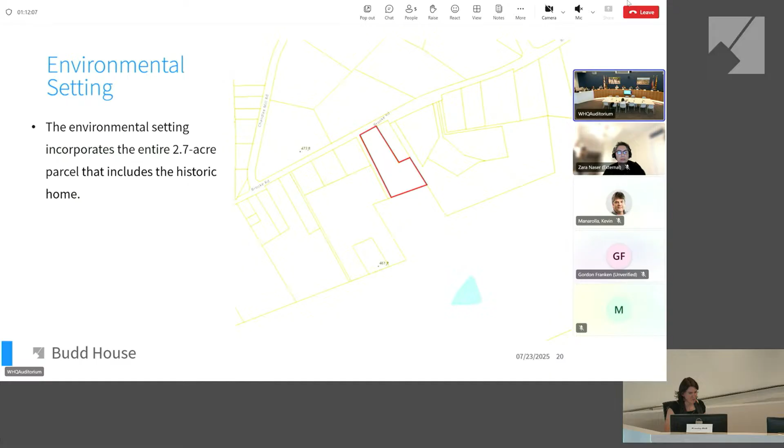Again, overall, staff found that the property meets the designation criteria and requests that the HPC takes the following actions: one, finds that the house meets the designation criteria; two, recommends that the planning board lists the property to the locational atlas; and three, recommends that the county council list the property in the master plan for historic preservation.

And this is our tentative timeline. We're hoping to go to the planning board in the fall and then on to the county council. And our last slide. Any questions?

Thank you. And we will now ask the property owner to speak, if you would. Good evening. Not just yet.

My name is Romaine Marie Rose, and I am the great-granddaughter of Richard Perry Budd and Amanda Armstead.

These are wonderful portraits that even as an infant coming into the living room, in the corner of the room, these were displayed. I will be 72 years old in 6 months. And it's been absolutely incredible that when I glance over and am able to see these photos, these portraits.

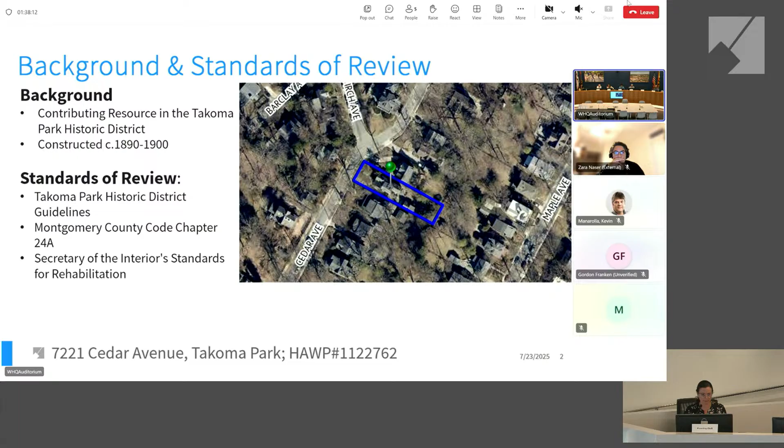Subject property includes a historic main block constructed in the 1890s with modifications made to the rear L, presumably around the 1930s prior to designation, and post-designation in 1994, 1999, and 2005. On the left is the Sanborn map from 1927 showing the historic main block and rear L with an open rear porch. On the right is an undated photograph from our files, which likely dates to the 1980s or early 1990s, since the district was designated in 1992.

Here are some photos of the property from HAWP applications in 1994 and 1999, showing the formerly open porch seen in the 1920s Sanborn was later expanded and enclosed into a shed-roofed addition with 2 windows on the south elevation prior to designation.

The property then received several modifications to the rear, including some minor fenestration alterations in 1994, construction of a 2-story rear addition that modified the original rear L and infilled the space over the earlier 1-story shed-roofed addition in 1999, and construction of a 2-story rear addition in 2005.

Here are a few existing conditions photographs showing the property. Some views towards the north elevation, location of the proposed skylight in 2019 before construction of an addition next door, and in December 2024 after that addition and without foliage on the trees.

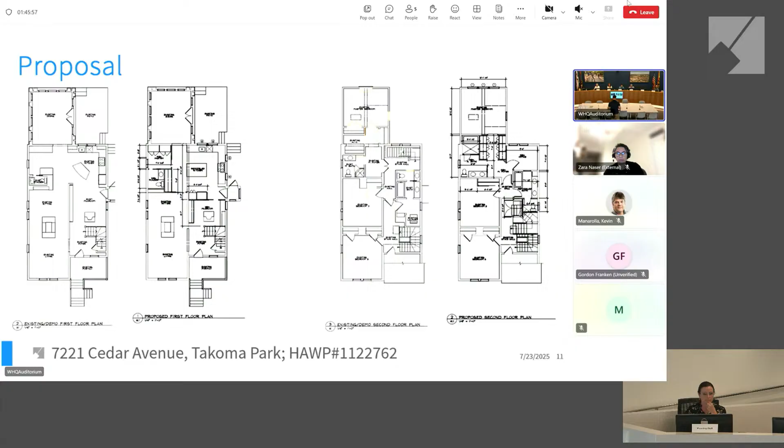Hi, Eric Saul. I'm the architect for the client, or the homeowner.

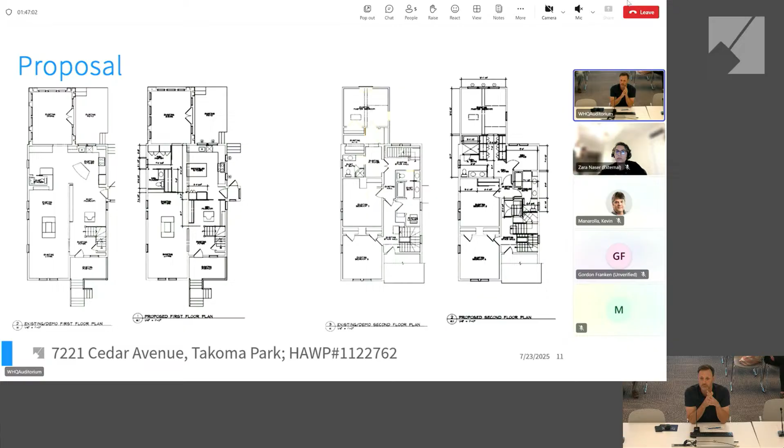Thank you. You don't often see windows buried in the framing of the house and just left, but are there any other questions for the applicant?

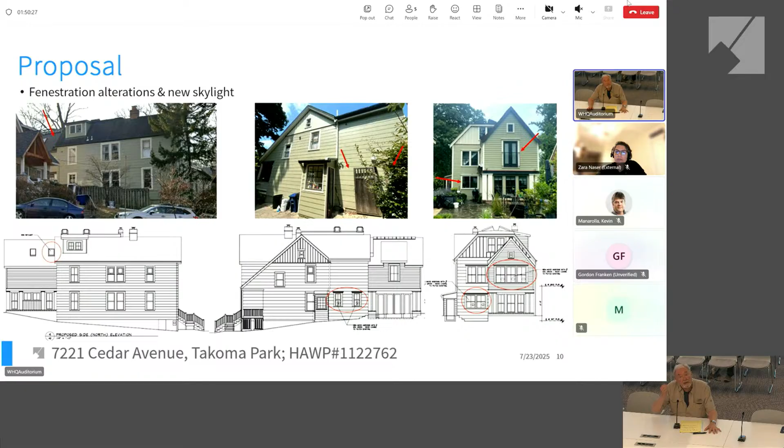Turning to the other point the staff mentions, that this is not truly visible. I think that relies on the fact that it would be directly visible but for shrubbery and vegetation, and I think the requirement is that we not consider shrubbery and vegetation as a legal basis for saying something's not visible. If this side of the house were deemed not sufficiently visible, we would be down to just concluding that the only visible part was the front of the house.

This is as visible as anything on the side, and both sides are visible from the street. So I'm concerned about those two windows specifically, and I want to emphasize that under Rehabilitation Standard 2 of the Department of the Interior, alteration of features, spaces, or spatial relationships that characterize a property will be avoided, and that's what the introduction of these two windows will do - alter those spatial relationships - and they are not dictated by the rehabilitation requirement that requires a new use before adding new windows to rear or other secondary, less visible elevations.

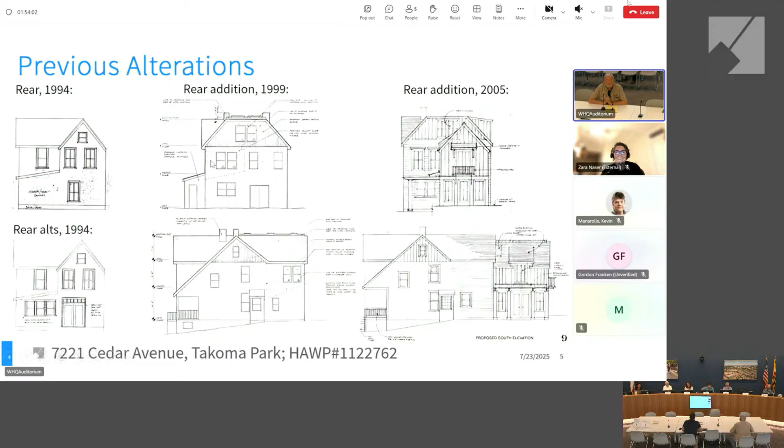And those two - I'm just trying to get my head around the construction of this area, of the portion of the house. There was a shed portion before the second floor was added. So historically, that shed portion was out there after 1927, but, looking at the picture right now on the screen, when was that added to the house?

This is Laura with the staff. My best estimation is, again, just post-1927. Unfortunately, the Sanborn maps for this area, I was only able to find the 1927 one. The following Klinge atlases, the first one is in 1931. It shows a rectangle with a front porch, but those atlases are slightly less detailed than the Sanborns were.

But here, the dashed line indicates an open porch, one story. It shows that it's set in from the side elevation. So my best estimation is between the 30s and 50s for the extension of that shed out to that line, and the enclosure. So the '94 addition just added a second floor to that? In '99, they added the second floor.

If you could go back to that previous photograph. So that photograph is 1999 - this one. That one is - okay, so the second floor hasn't been added. Correct. And this is from that application for that addition. And there are clearly two windows there, and you can see the sills - they're in shadow, but you can see two sills in shadow here also. Okay.

And thank you for coming forward. We always welcome all comments in this meeting, and we appreciate that you've come tonight. Moving forward, item 2F at 10012 Menlo Avenue, Silver Spring. Is there a staff report?

Good evening, Madam Chair. Dan Bruechert for the record. This is a retroactive HAWP at 10012 Menlo Avenue in Silver Spring. This is a nominal resource, which for the district is post-1935 within the Capitol View Park Historic District. The house itself was constructed circa 1946, and this is to be reviewed under Chapter 24A, the adopted Capitol View Park Master Plan Amendment and the Secretary of the Interior Standards for rehabilitation.

Just to familiarize yourself with the block that it's on, it's surrounded by largely non-contributing resources. As you get to the north, we do have a 1923, a 1906, and an 1890 house, but none of those are in the direct view shed.

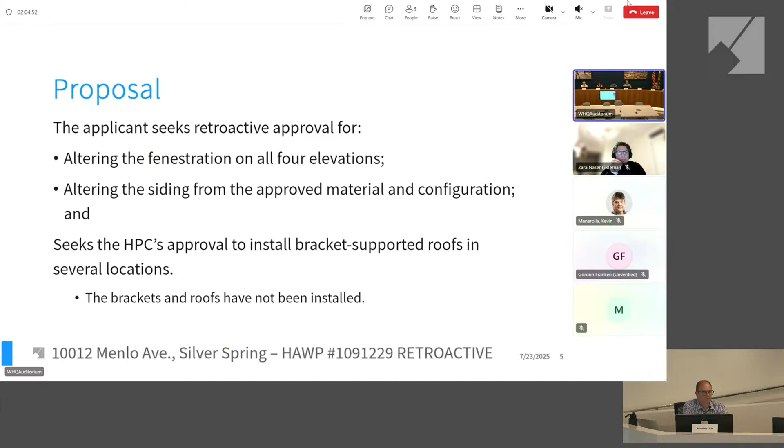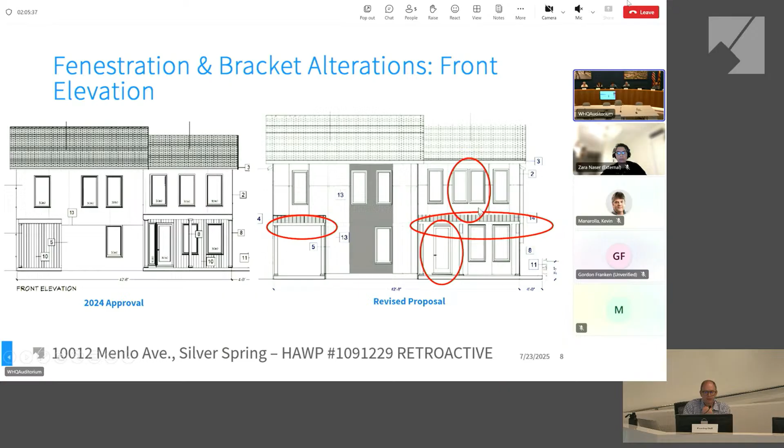So we're going to work through fenestration and bracket alterations first. This is the front elevation. You see proposed bracket-supported roofs on the left and the right. Instead of the approved 3 windows, 4 were installed on the second floor. The approved door had a sidelight that was removed.

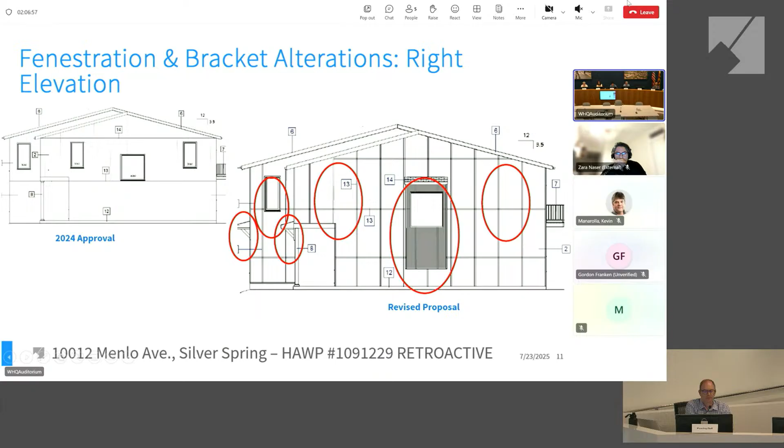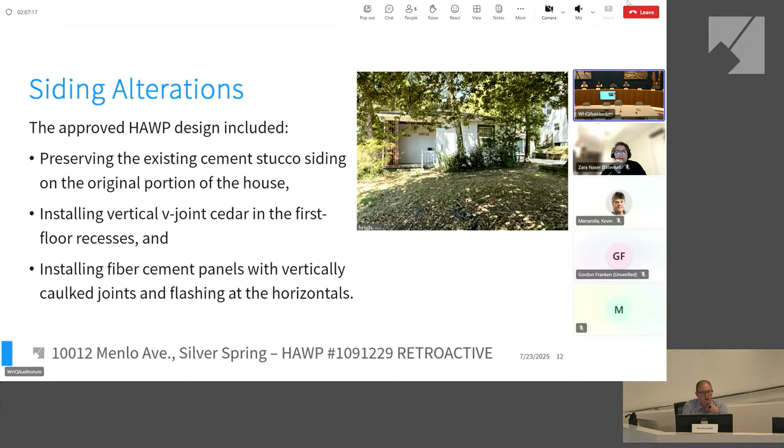The approved design also included preserving the existing cement stucco siding on the original portion of the house, installing vertical V-joint cedar in the first floor recesses on both the left and right, and installing fiber cement panels with vertically caulked joints and flashing at the horizontals. These are the approved siding materials - you see examples of the caulked joints with flashing at the horizontals, and the cedar was to be installed vertically rather than horizontally.

During construction, the applicant installed a rain screen, which altered the overhang and the ability to install or express the stucco as originally proposed. This is the result - we get sort of Hardie trim pieces, a 1x3. If this were all vertical, it would be board and batten, but it may just be considered battens.

At the front, the commissioners pointed out that the central form aligns with the top of the window, but it doesn't align with the rest of the siding on the first floor.

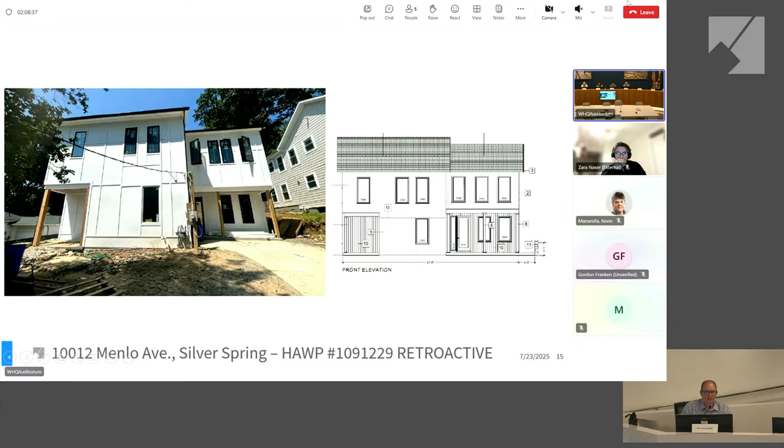Going back again, this space was supposed to be expressed cement stucco siding. We're supposed to have vertical cedar planks installed here and here. On the left side, we have a different expressed first floor, except the treatment was applied throughout the entirety of the left elevation.

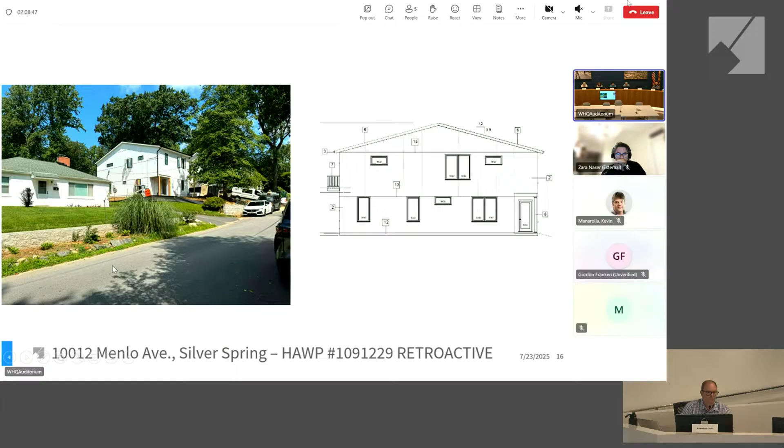And then on the less visible sides, again, we have a different treatment on the first floor than the second.

Staff's findings as it relates to the fenestration alterations: we find that they don't have a substantial impact on the overall character or compatibility of the building. The original approved window placement lacked a formal arrangement and was going for a sort of contemporary design using many of the openings on the existing first floor. Staff finds that the projecting bay and small shed roof on the right elevation do not disrupt the overall massing of the approved design and are on an elevation that has limited visibility due to the setback of the neighboring house. However, staff does not find that the proposed shed roofs over the 2 paired windows on the left elevation are a compatible feature.

Staff does not find that the proposed siding treatment is typical of a historic district and finds the treatment more consistent with commercial or apartment buildings, and finds that the applied grids disrupt the flatness of the approved design. Staff finds that the removal of the vertical siding on the 2 front recesses eliminates additional material variety, resulting in a monolithic uniform appearance, and staff finds that the misaligned trim at the front of the house draws additional visual attention to the siding treatment.

Staff finds that eliminating the cement stucco siding eliminated a strong horizontal element that helped break up the highly visible elevation's massing, and notes that traditional architecture would often apply a bandboard to break up a single plane, just to make the massing appear a little less massive.

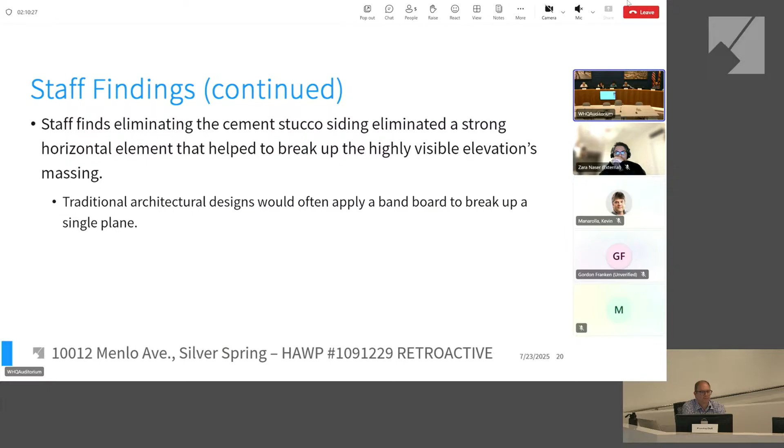So staff actually has two recommendations: approval in part and denial in part. Staff recommends the HPC approve the HAWP for the fenestration alterations under 24A8, B2, and D, standards 2, 9, and 10, with the added condition that detailed specification sheets with dimensions must be submitted for the new windows, and dimensions and specifications for the proposed roof brackets must be keyed on revised elevation drawings. The rendered bay window projection must be removed from the right elevation and is not approved.

With final authority to verify these details have been satisfied delegated to staff, and additionally, staff includes as part of that condition that no final inspections of the property will be approved until this condition is satisfied and the HAWP document issued. And that the HPC deny the siding revision HAWP under 24A8, in violation of 24A8B2 and D.

Alternatively, and this was laid out in the staff report, if the HPC determines that the revised siding is acceptable, as it does not alter the size, scale, and massing of the proposal, staff recommends the HPC add two conditions: one, requiring the application of a traditional stucco finish to the entirety of the first floor, and two, that the central panels be removed and reconstructed to align with the front elevation on both the first and second floors. And with that, I will answer any questions you have.

Are there any questions for staff? This is Chair Burdett.

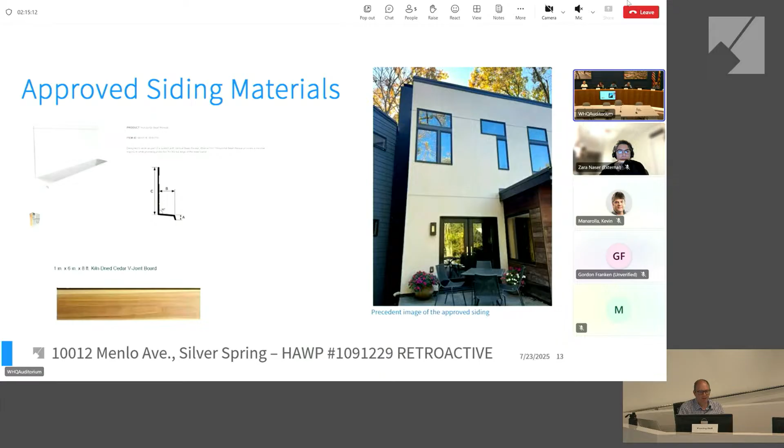Okay, so I think it's more about adding to the streetscape and just the overall construction of the district. But as staff noted in the initial slide, this whole area of the district was constructed sort of post-World War II. So none of these resources, aside from the three at the north end of the block, are identified as one of the two contributing periods of construction within the district. Okay, okay, thanks.

Are there any other questions for staff? If not, I will ask the applicant to come forward. Mr. Salim Badawi?

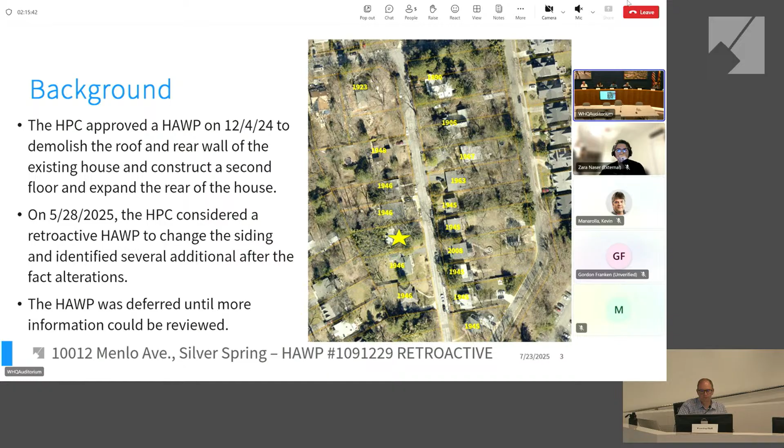And if you'll turn on the mic and identify yourself and your relationship to this project for the record, please.

Thank you. My name is Salim Badawi. I'm the owner of the house on 10012 Menlo Avenue. You can make whatever presentation or explanation that you'd like to make about the situation now.

Okay, so as discussed last time, the plan was to install fiber cement Hardie panels with caulking in between the joints between the panels. And as mentioned before, when I spoke to contractors, none of them seemed aware of that product, the Stucco Hardie panels, and I couldn't even find them. You can do your research on Home Depot, Lowe's, ABC Supply - none was carrying them.

The other main concern was what the contractor said - that if you caulk between the panels, and this is a new house, we're doing an addition but it's almost a new house, the house is going to settle, and all the caulking is going to crack, and you will have to reapply the caulking again. That for me was the biggest issue, because I don't want to leave the new homeowner with something like that.

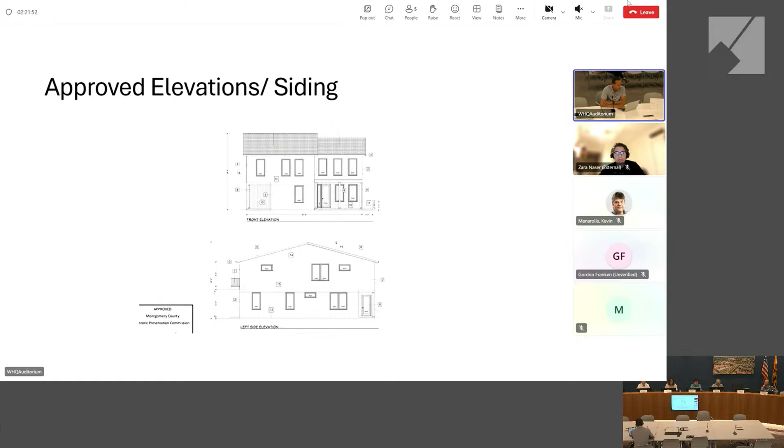So if we go to the third slide with the front elevation - here we go, front elevation. The proposal is to add two roofs and brackets over the two porches and apply a different paint color. Understand that paint color is not restricted or doesn't need to be addressed by the HPC, but I'm trying to show it with the plan on the front elevation.

For the rear elevation and the side, you can see that we added a bay window. There was a window, but there wasn't a bay structure. This was completely unplanned. What happened is that because we have a 10-foot ceiling on the main floor, we had an issue with the staircase. Because of the height, to get the right slope by code and the right height for the risers and the depth of the treads, we would have gone into the hallway by about 1 foot. So after a lot of deliberation with the contractor, it seemed like the most plausible option would be to push that wall - behind this wall is the landing of the staircase.

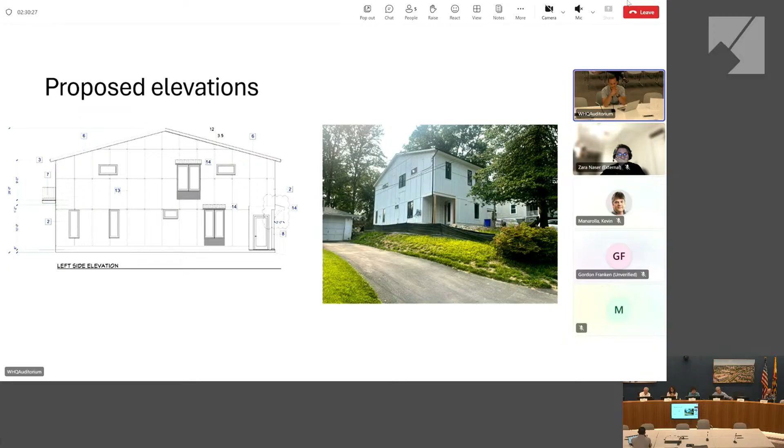Are you going to widen that horizontal band separating the second floor from the first floor? Yes, we're going to install a band, like a 1x8, that goes straight across.

It looks awkward now, and that wasn't the plan. So what we're going to install is what you see on the elevation now.

So on the two upper windows, are you going to get rid of that cross piece, and bring the battens down to the fatter horizontal? The two other windows on the second floor, with the little panels below, we're going to remove them.

So what will it end up being? Will it be like four battens across there, going all the way down to your horizontal? Because you've got to have some seams in there, and all your other seams are battens. I'm just curious about the pattern when you're done, once you take off that out-of-place horizontal piece, if those verticals are just going to come straight down to the band below.

I'm thrilled that you're putting in the band, by the way, because it's driving me crazy that those things don't line up. So I'm encouraging of that.

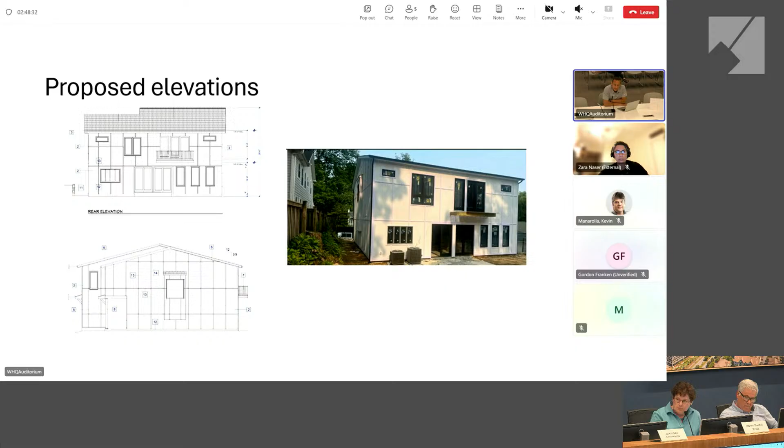I'm not going to go into all the things I think are wrong with this, because there is so much. I was going to tell you you should look at another system if you can't get hold of the one you wanted to use. There are other manufacturers out there you can use, but obviously you've thrown out that idea because you say it's not available, even though I'm not sure you've done your research. So I'm going to ask staff to please explain in detail your recommendations from your report on what we approve and what we don't approve.

Now I have to respond to what you mentioned, that I kept going after April. Can you show me where I kept going after April? Well, the rain screen for one. What is rain screen? I came here after I completed the siding, after I installed all the Hardie panels. That rain screen was completed before I came here in April. So I'm sorry, what you said, that I kept going after April, that is entirely incorrect.

Entirely incorrect. And if I go back to what you mentioned, that I had to keep the stucco, no, I didn't have to keep the stucco, and I wasn't told to keep the stucco. It was my proposal to keep the stucco. I was never told that I had to keep the stucco. Okay? Let's talk about keeping the stucco.

It bypassed us, or we overlooked the fact that it would have looked awkward that we keep the front and the part of the left side. It bypassed us, or we overlooked that, and it wasn't caught by the staff as well. Then if you go back, can you show us the picture with the stucco and the rain screen? Yes. So there are some parts that you couldn't foresee, okay? And this would have been looking very awkward if it was kept like that. That's when you come back and let us know.

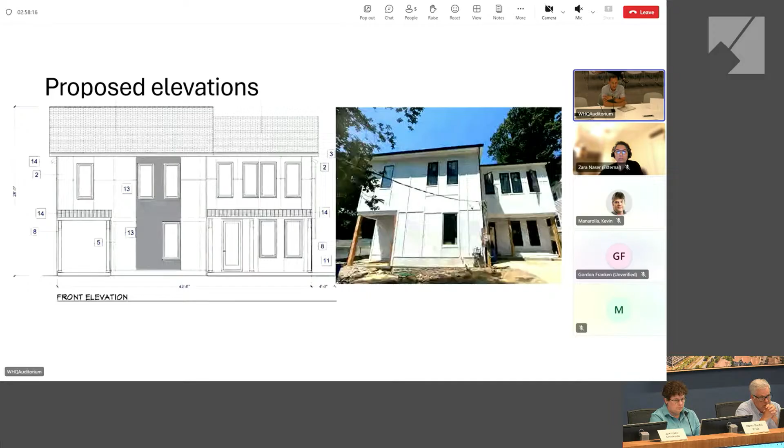If you go to my presentation, the last slide. This house is on Nebraska Avenue Northwest, so that's a historic district. You can see that on the second floor they have the same siding treatment, 1x3 trim work around the windows. On the first floor they have brick, with a bonding beam in between, which I think successfully breaks up the front elevation. It's a very similar structure to mine.

Do you notice that the batten locations are more balanced than what you have? Correct, yes. And that comes from placing the panels, having forethought about how the panels get placed on the elevation, and not just slapped up? Correct, yeah, I admit that.

Dan, can you bring up your recommendations? Okay.

Staff is recommending that we approve in part the fenestration alterations, with the condition that detailed specification sheets with dimensions must be submitted for the new windows, and dimensions and specifications for the proposed roof and brackets must be keyed on revised elevation drawings. The rendered bay window projections must be removed from the left elevation and are not approved. Final approval authority to verify these details have been satisfied is delegated to staff.

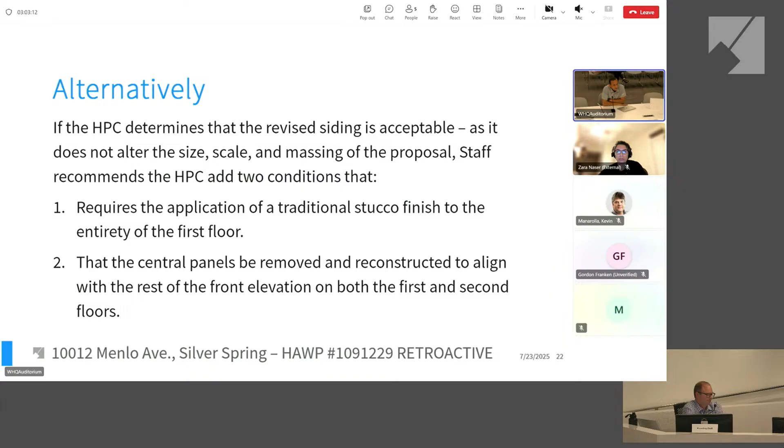And you can do a traditional stucco finish on a rain screen with the appropriate backup. Commissioner Doman is right there, so there's your answer. I guess mine was given the inflection of a question, but I know perfectly well it's a doable thing.

All right, would the commissioners care to deliberate? Commissioner Doman.

The house that our applicant showed on Nebraska Avenue, is that actually in a historic district? Yeah, it is. Okay, but it's not in Montgomery County, it's in DC. No, yeah, DC. And as you have testified, it is very similar to what we are suggesting, if the HPC approves.

Yeah, I mean, it is in a historic district, and they have a similar treatment. I was lucky, I'm glad that I found this picture of the house. I stopped the car and took a picture of the house.

So they have similar siding treatment on the second floor, and at the first floor they have brick. So if we do stucco, I think the stucco can be applied on the Hardie cement panels. I believe we can do that. Yeah, that was my question.

I think the way it's leading is that the recommendation, the alternative recommendation, is to make the first floor stucco. And you are fairly certain that can be done? We have cement panels, I'm sure we can apply stucco on top of it.

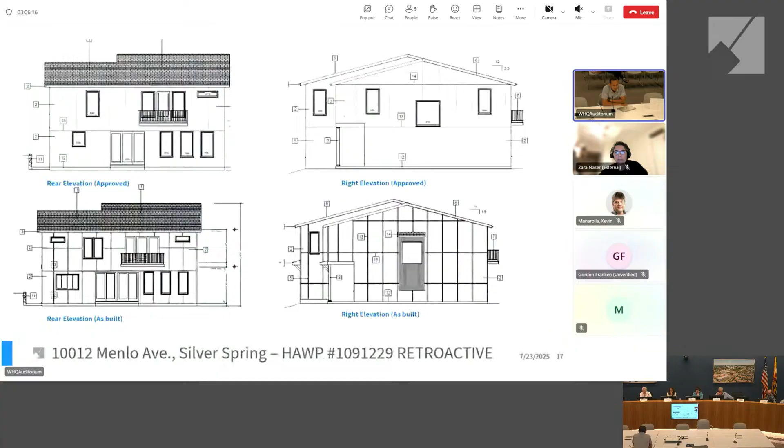So proposed on the left elevation, bringing it back here, the applicant proposes to install two very small roof overhangs, sort of almost as a window hood above these two paired casement windows. Staff finds that those are an incongruent form and aren't balanced and compatible with the design, and are recommending that they not be installed. They haven't been installed to date. We're recommending we're okay with the right bay because of its limited visibility, particularly as it relates to the house next door, but we're recommending that the approval not extend to these features.

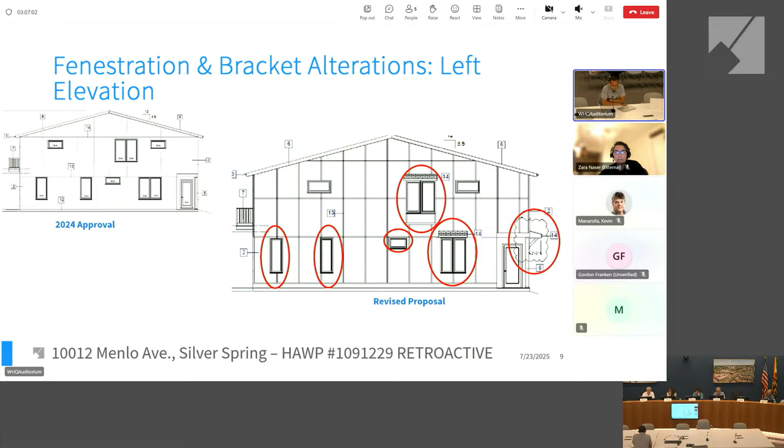And I understand. Okay, so for the applicant, if I deviate and ask a question, this doesn't pose a problem for you, does it, to remove those little sheds? No, I'm volunteering, they're not even installed. I understand, I'm volunteering to do that, and I was going to incur more cost to address that large wall. I don't have to do it. If you guys don't want to approve it, okay. Alright, that's all. Thanks.

Commissioner Pelletier? Oh, my mic's been on this whole time.

I do not like those little projections over the bays because they don't look modern. You're doing a really modern house here, and those are kind of like farmhouse sort of awning things that I don't think it needs. I would recommend not doing those. I don't have a problem with the bay where the stair is because you can hardly see it. But I would approve this in its current condition.

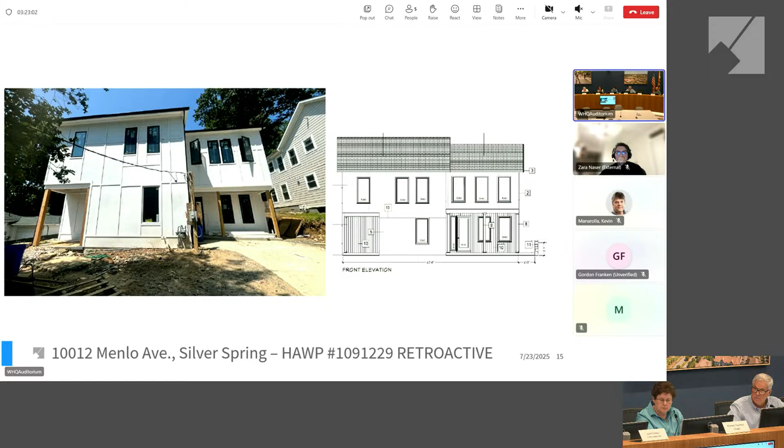Is staff okay with that? Staff understand that? Yes, Madam Chair. Does the motion also delegate final approval authority to staff, or do the commissioners want this submitted as a revised HAWP? I think we delegate to staff, please. Second with the stated details, this is Commissioner Pelletier.

All in favor, say aye. Aye. Aye. Chair abstains, this motion passes. I'm sorry, did we get a vote from Commissioner Naser? Yes, I said aye. Okay, thank you. So 5 ayes, 1 abstention. This HAWP passes. All right, thank you.

Thank you, commissioners. It was a painful process, unintentionally, I promise, and hopefully I wouldn't come before the commission again. But thank you so much. I appreciate everything you're doing. Thank you.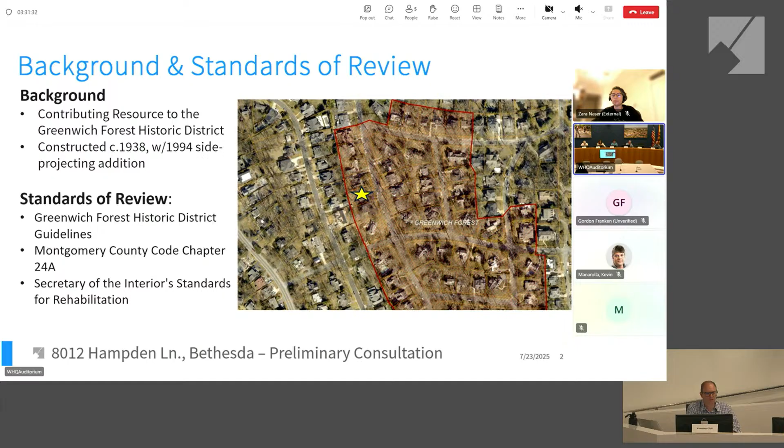So the applicant proposes to remove the existing slate roof and install a new architectural shingle roof. This is a detail of the building you see, sort of modeled with a slate roof with greens and reds. The report indicated that there were over 500 slates that were damaged or cracked, and that at a certain point the roof reaches a tipping point where it needs to be replaced rather than repaired. I'll note that there are 2 sections of 3-tab asphalt shingle on the rear of the 1994 addition, and then a 1-story shed roof addition of unknown date that also has 3-tab asphalt shingles, although the original side porch still has slate on it.

So the reason we're here is guideline D7 is either internally inconsistent or just a little convoluted. I've broken this up into a number of bullet points. Guideline D7 in the design guidelines, regarding building materials, says replacement of roof, siding, and trim with original materials is strongly recommended and is considered maintenance that will not require an application for a work permit.

That's in-kind replacement, which is acceptable in every historic property. It says the use of non-original like materials, such as architectural asphalt shingles, requires a work permit to ensure that they match the scale, texture, and detail of the original materials and are consistent with the overall design of the existing house. For example, homeowners wishing to replace slate or tile roofs may use alternative materials that match the scale, texture, and detail of the roof being replaced. And finally, if an original slate or tile roof had been replaced with non-original material before July 1st, 2011, the homeowner may replace the existing roof in kind or with another material consistent with the architectural style of the house. That is not applicable here.

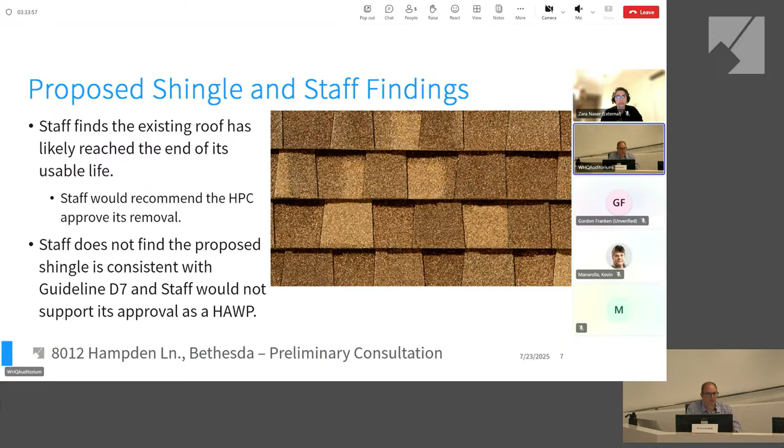Just doing a little bit of research, staff identified 2 slate roof replacements in the last 5 years in Greenwich Forest. However, both of those were slate for slate, so no HAWP was required, and those were eligible for the county tax credits. I did find 1 roof replacement on a 2012 HAWP, which was, I think, either the first or second HAWP in the Greenwich Forest Historic District after it was established.

After a first deferral, the applicant proposed Grand Manor architectural shingles, and the HPC found that these were compatible under D7 and generally matched the depth and dimensions of the historic material. That is actually across the street, at 8017 Hampden Lane. They installed them in a dark gray. I've provided them in, I don't remember what red or brown color they call it, just because the details are better represented in the detail image.

Staff also identified that CertainTeed makes a Highland Slate architectural shingle, which are rectangles, and GAF has a slate line which also sort of emulates the shape of slate, which may also work. Staff finds that the design guidelines appear to be internally contradictory about when it is okay or isn't okay to use an architectural shingle specifically. But staff finds the proposed shingle fails the requirement that the material match the original and the overall design of the existing house.

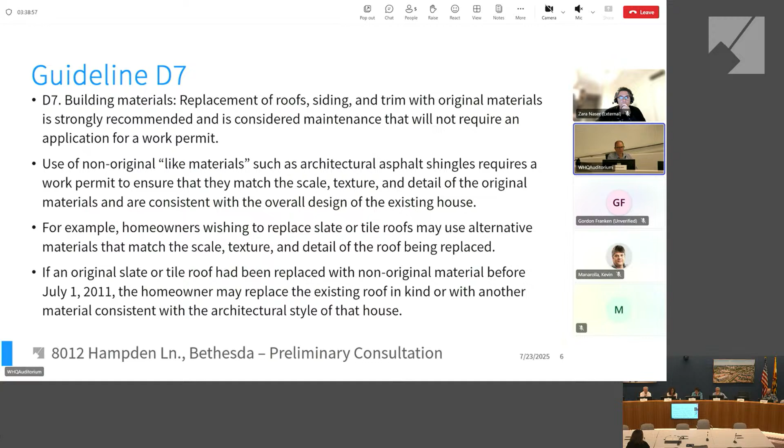The Grand Manor is actually an asphalt type shingle, is that correct? Yeah, it'd be like a 3-tab, only thicker.

Do we have any precedent where we've actually used synthetic slate on houses? I'm not that familiar with the products, but I assume there are slate products that look like slate. In this district, the HPC approved a synthetic slate product called Majestic Slate on additions to a house on Overhill, I believe it's 7823, but don't hold me to that address. There's a side projecting and rear addition to a house with a slate roof. The HPC maintained the slate roof on the existing house but approved a synthetic product on the additions.

I've not seen these products. I guess if I could drive by, I could take a look at the address you gave me and see if it appears as a slate roof. The synthetic products have gotten substantially better, but I think typically where they fail is in the shine. Natural slate starts duller and continues to dull and get dirty. These materials, which are basically a petroleum product, are shinier - not like a white vinyl fence, but shinier - and they tend not to dull in the same way the natural product does. So the HPC has approved synthetic slate, but it's only been on additions or completely new construction within historic districts.

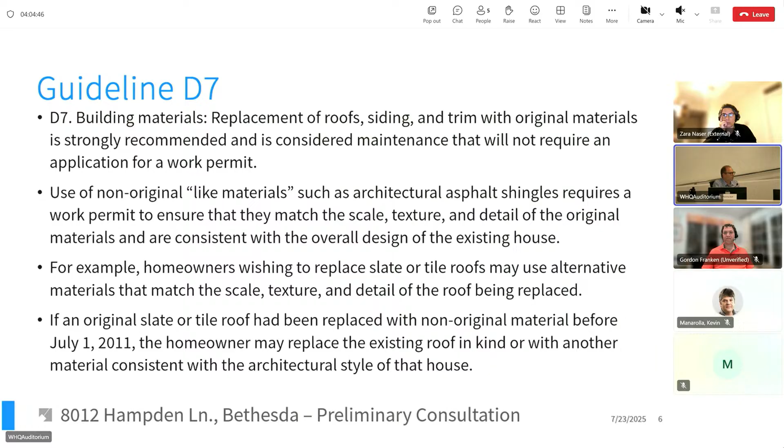That's really why we're here this evening, for a little more guidance. There are only about 48 to 60 resources in this district. So we're trying to get guidance from you, in addition to guidance for this specific applicant, to help property owners in the future when materials invariably fail.

I think there's also a difference in priority, if I could reinforce that respectfully. If, say, Gordon and Amy moved in and found out they needed a new roof, and were planning on spending the next 15 years in the house, my guess is they'd go with a slate roof because it's easier to get through the process and they'd be able to enjoy it for years to come. I think the motivation, whether the owner is staying or leaving, factors into the decision to put on such an expensive product. When they're no longer going to own the home, it unfairly puts a financial burden on them that I think can be resolved in other ways. But that's my opinion—obviously I have to defer to you.

Can I ask a question, or think about this for a minute? If the current owner, who no longer lives in the house and isn't moving back, has to put on a very expensive roof, couldn't they add that to the selling price of the house? I'd like to say theoretically, yes. But the last 5 years we've been in a complete seller's market, where sellers could write 100% of their terms, and I'd tell my buyer clients unless you're willing to give away your firstborn, you're not getting a house. That market has shifted, and we're now in a much more balanced market.